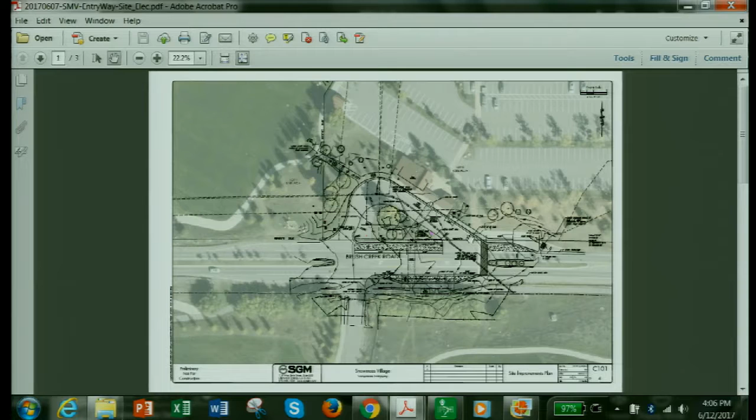The parking spots that are going to fill in where the current bus stop into town is - are they parallel or head in? They are parallel with the road, so cars are gonna be parallel parked along the edge of the road there. I believe I have to look at the dimensions, but I think it's 2 stalls in there, and that's generally what we see.

So the current lane that's there - that turn lane - it really isn't utilized. Majority of our transit movements are coming here and using this center turn pocket right here, and turning into our location. RFTA doesn't turn right to go into there, they stop here, so there's a really low amount of traffic count. Is there something I'm missing on that right turn? This one right here was just a bus stop pullout, so it wasn't really a right turn per se. It is signed for right turn, but it's not utilized.

So we're trying to use some of those concepts of narrowing the width so that it has that more safe feeling of pedestrian crossings as well as the traffic and bike calming.

Does the bike path come up any further than the existing? I didn't see that on there. Bike path is right here. But from the other side of the road, where does it cross? It doesn't - it stops down at the recreation center. But we still have crossing down there.

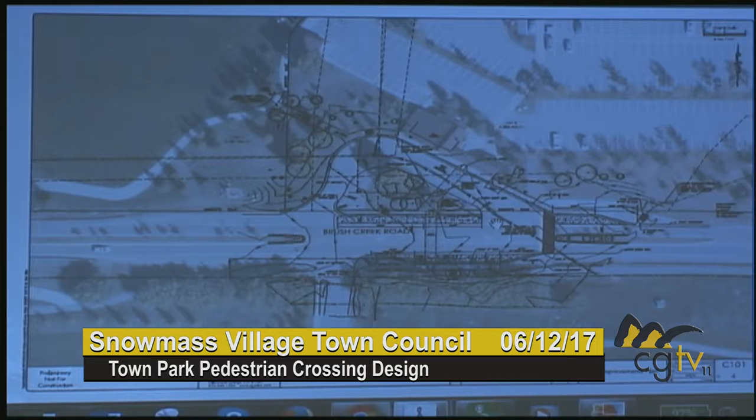So let's talk about this information area. You're saying 3 cars can get in there? 2. How often is the 15-minute used now?

Depends on the day, you'd have to ask marketing, but we realize that this is a potential to add a little better access to that building for people that missed the sign and don't really want to go into the parking lot.

They turn around and come back, go through the bus area. I see it happen all the time. They miss it, so they go through the bus area to turn around, or they park right here, get out of their car and go in. I see it all the time during ski season and when we have heavy visitors.

So we're trying to still encourage this location, but it'll still continue. It probably will, because that could be inconvenient. Oh, it's snowy, it's icy, I'm just gonna pull in here.

Is there any way that we can incorporate those two spaces in there to make it more convenient for people to park in there? Clint? David, answer that. I'm just, and it's a hell of a question. No. That's why I let David answer it.

Well, but the problem is, when they miss it, when they hit the roundabout, and they've come to Snowmass for the first time, they're totally confused at the roundabout, and then they've gone a little further, and they've already passed the parking lot. Well, there's that great big sign, if you'd only read about 20 things on that sign. They don't, and I wouldn't either, would you? Right, so then they see the information center, oh, there's the information center.

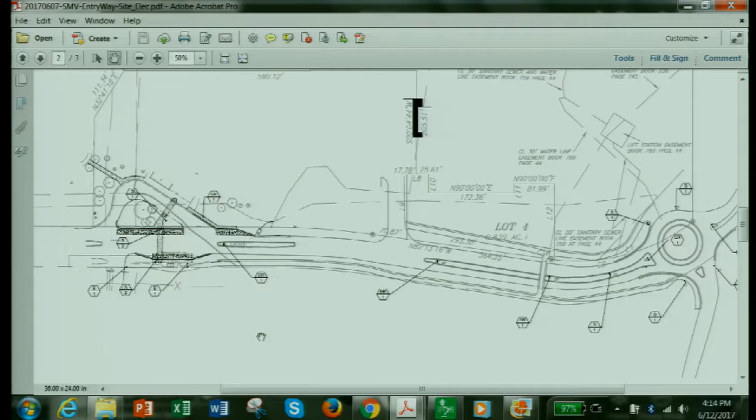So what's being proposed is to add the lights at the crosswalk, before the crosswalk, so that, sorry, that needs to go on that side. I need to talk to him about that. I just realized that. So you illuminate the pedestrian and all that.

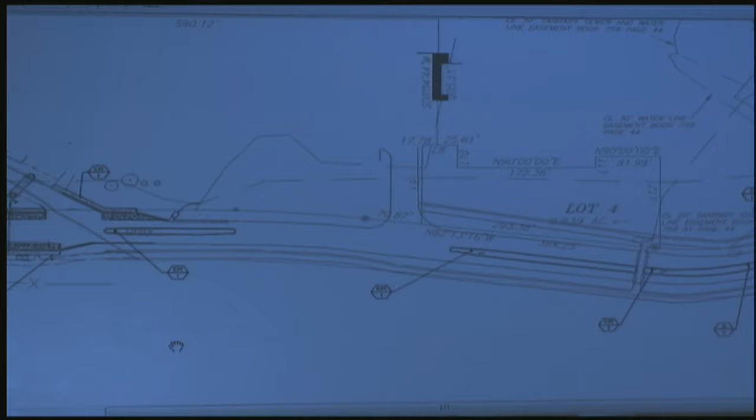And so S2 is a double head and S1 is a single head light. We are not proposing to do these additional lights at this location. Right now, when I initially talked about it, I said what would be the master plan, and then we can phase as we go.

So that's just, we can go back and forth on this one. I'm sorry, I was writing, what's not being proposed at this point? The ones around the roundabout? Yeah, so we have some existing here, and at the crosswalk here and here, but we're not proposing to supplement those. Are those ones around the roundabout similar to what you see at the other roundabout?

They are the standard detail, and I can show you the light if you want, or I've got Google, we can go look at it too. They're the same light poles that we have, because we're trying to be consistent in our design standards.

We have already converted these to LEDs. However, they are a different LED than was put in at the roundabout. The ones at the roundabout are a different manufacturer. These were a retrofit, so we would like to propose we go with the manufacturer retrofit so we have consistency. That is one of the project details we're looking at. It's not a large change-out, but I think it would be consistent to have consistent parts and pieces.

I guess the issue for me right now is that coming out of Club Drive, right here, that road, that corner is very dark. It is, and it has no lights right there, so we're proposing one right at that intersection, in addition to one at the crosswalk.

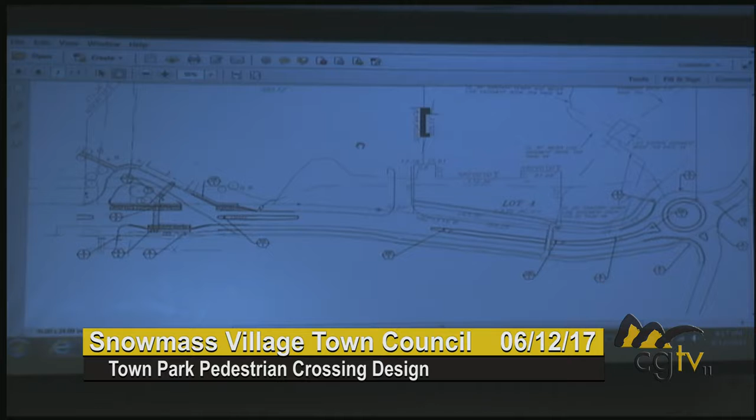And one for the bus shelter. So we actually have 3 in there. Let me go to this next drawing. I did not bring you, and I probably should, I apologize.

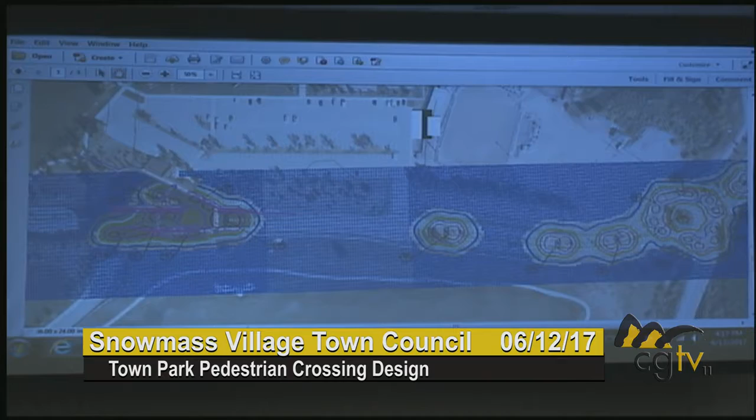The drawing that shows existing photometrics versus proposed. Basically, this is a plan that shows the lighting patterns, it's a little bit of an art, so don't get too dialed in on it. This is what would be proposed with the new lights in this location. So the summary is basically there's a consistently lit area that accentuates that it's high activity, there's pedestrians, there's a lot of things going on, beware.

That level of brightness compared to the Brush Creek and Wood Road roundabout is similar, because we're trying to have this at 0.1 foot candles, or 1.0, I can't remember which way it is, but that's the lighting measurement.

And I should have brought that other drawing, but this is existing conditions. If we were to put the rest of these in here that showed on that plan, it would basically connect this lighting so we wouldn't have like a hot spot, low spot, hot spot. We can consider that, but I'm looking right now at the budget we've approved to just focus on this area and continue to do these checks on it.

Is it what we all intended? Does all of this lighting meet the night sky standard? Yes, it's all downcast, it meets all the design standards there.

So the other thing we're proposing, and Bob, I think you had asked this question about smart technology, that we would propose to put in this location - I'm going back to this drawing. Basically, they have a feature that's an add-on to our existing lights, like a puck on top of it. It won't be visible unless you really are aware of it.

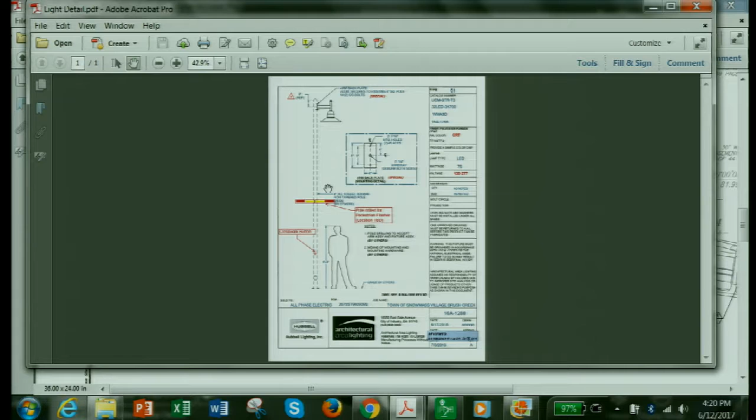Light bar there, and there's a push button here, and then there would be a pedestrian sign, the standard pedestrian sign on there. That would be those two locations that are at the crosswalk, right here, those two.

The other feature that we're looking at adding on the electrical side of things is a light inside of the bus shelter. As far as RFTA, we would like to move towards that as well, it's motion sensored, so that when it's occupied, and I don't know the answer if you can push button too, but if it's occupied, it illuminates the bus shelter.

It helps with sensing that someone's in the bus shelter instead of doing the old reflector waiver thing. So we proposed that, since we're doing all this work in this area.

This looks great. So the timeline is, we've got the design to this point. We are trying to determine, with this, it would take out this crosswalk. It would have, basically, we're looking at the asphalt treatments, is it milling this whole area, cutting this in? So we're looking at those different options as far as budget.

Just so you know, this road is in our 5-year plan to get milled and overlay. You can start to see some of the rutting taking place down here when you're driving through the roundabout. So I'm kind of taking a couple perspectives on phasing on this, on the asphalt side.

We'd like to get it out to bid as soon as we get the okay from RFTA on making sure that this meets their design on the bus stops, and still go out to bid for construction this fall.

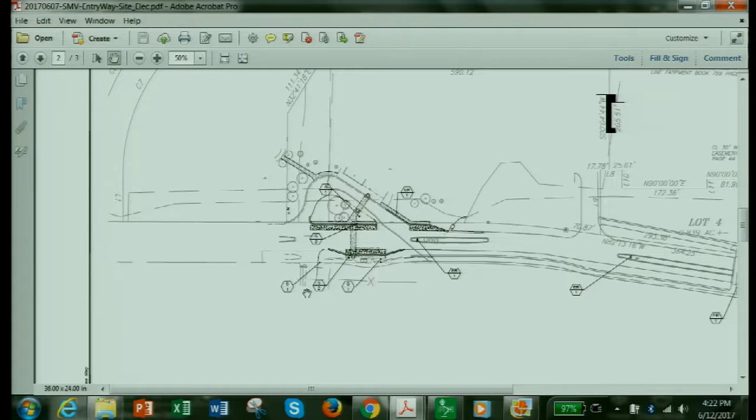And I guess on the current crosswalk, which is obviously constructed - where was it - looks different than the rest of the road, right? Yeah.

Are you suggesting that you might not take that red stone out at this point? No, I would take the red stone out because you don't want to confuse it. Right, yep, so this would be removal of this.

What I'm trying to determine is what's my limits on asphalt. So I know I'd have a patch here no matter what, and do I go from here and patch it all the way to this other crosswalk? It's just my limits of asphalt repairs. Is that red material, is that reusable for the new crosswalk?

No, it's actually getting pitted pretty bad because of snow removal and chemicals and things like that coming into the village. So it needs treatment, it needs to get removed.

And then we would do the same differentiation in color here and probably band it with the white as well, white concrete, so you have a visual. Is there a better product that would hold up? It's just the amount of traffic, okay.

And correct me if I'm wrong, but you're gonna make that decision when you see the bids come in. Yeah, and if they come in great, you can probably get a lot more asphalt down. If they come in super tight, we'll probably do a little less asphalt.

The other thing is, when we're gonna bid this, just so you know, is because I'm very cognizant of construction schedules, and the lessons we're learning is, don't have big restrictions on your construction. I probably will have an alternate to complete by June 30th of next year, just to see if my price differential from this fall to next spring is major.

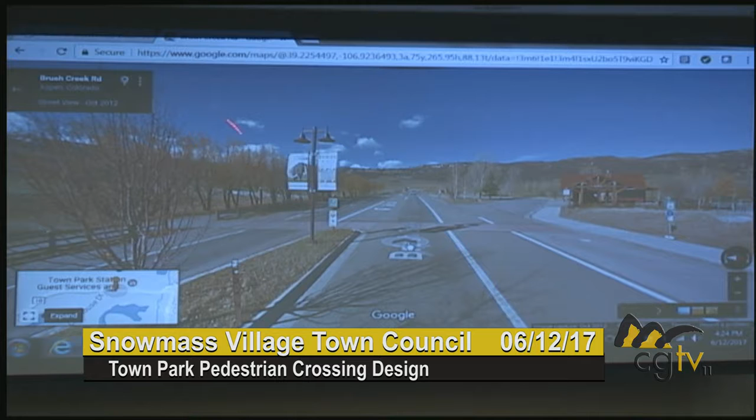So you're putting that fence back in, this opening? Yes, oh, we'll close that off, because this will no longer be a crossing, so we'll eliminate this and get rid of that. And then there's a fence opening down there. I don't know, you mean move down?

I know when they do Jazz Fest and stuff, they cross people there. Is that going to impact that? They will just incorporate this into their project. We talked about that, and they've been talking about changing some of the operations anyway, and just work with what is in place.

And how much fence panels come out, too. What's the distance from the new crossing to the only other place you can cross by the rec center? You know what I'm talking about? Oh, so you're talking down here? Yeah, because those are really the only two places they can cross, right? That's right.

Travis? Where'd I go? Oh, there we go. So the other tab, okay. Go here? Aren't you looking here for the measurement? Oh yeah, there we go. Oh no, we don't want that. Go here, can I go here? About that much, Lisa. I think there we go.

Let me zoom in. So you're talking about this crossing here? Yeah.

I mean, theoretically, someone could cross where the rec center drive is, but then they'd hit the fence, right? There's an opening right there. There is an opening, I think, but it's not a sanctioned crosswalk. I think we should continue to look at all these. We've improved some and just continue to monitor.

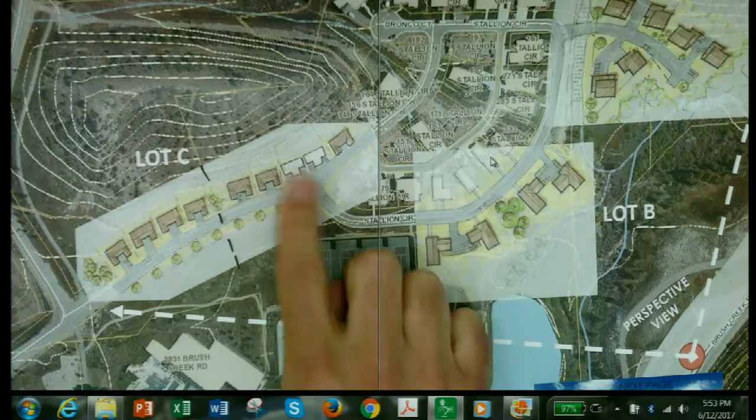There's already some there, yeah, there's three. There's Hy-Vee living down there, right there. And that's pretty nice.

The other ones, what are we talking about? They're different, so duplexes, single family, and they're 2 and 3 bedrooms, a mix of 2 and 3 bedrooms. There's a mix of 2-story and 1.5-story. These are conceptually designed for walkout basements and 1-story. These are 1.5-story and these are 2-story.

The other thing, down here we have the duplexes, we're talking pretty steep grade. Yep, and we understand that. There's some of the designs that, again very conceptually, were meant to actually have them built differently so that we wouldn't have to dig so much and save some money in constructability, which we did do on the ones that are Hy-Vee's existing. Yeah, they are right at the toe of the slope.

They are. We actually talked about condemning the whole area where the four on the left are, you can see the property line that goes right there by the C. To the left of that is Horse Ranch homeowners, and to get the road into Rodeo Place, we had to condemn it. It's not extremely valuable land because it's zoned open space and the uses are low, but it was a very complicated valuation. In the grand scheme of things it wasn't that bad, it was like $115,000 to gain the road access.

Can they park on the street in that section where those duplexes are? So when we get into the design, one of the things we want to talk about is road width here, and do we do some kind of bulb outs and have parking so that it could slow traffic going in and out? We hear those complaints about speeding traffic. That gets into snow removal, we haven't got that far yet.

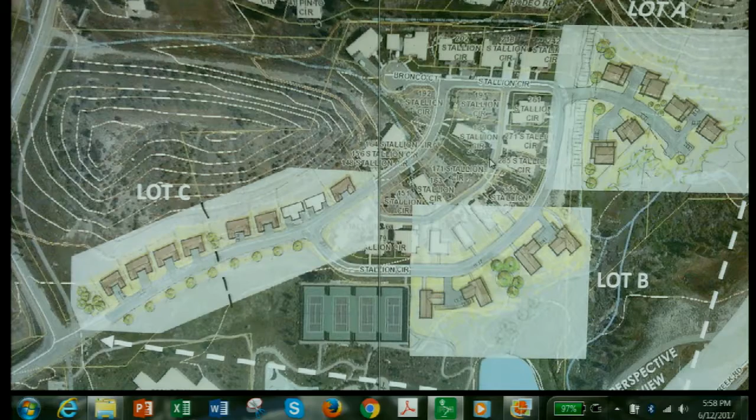Is the rest of Lot B developable land, or is that where all the wetlands are? There's a lot of wetlands. The creek really meanders down there to the bridge where it goes into the county. And we had trouble when Seven Star wanted to be annexed into the town, even getting a viable site on the upper side. And what you're not seeing here is that there's this tail that wraps around the mountain. That parcel's 67 acres, but it's all subject to deed restriction in the county.

So there's the Seven Star that's usable, a triangle shape, and the town, as part of the annexation, got the front lot where checkpoint, the parking area is, and then the owner got the other side, and it really came down to one large home site. That's what he wanted, one large home site.

I was gonna show you, we've got all that mapping. This is not the map to show wetlands or not, but okay, any other points for discussion? We're gonna keep moving forward and we'll keep you updated.

I had a question, just when you're going back to talking about demand and all those things, I had a discussion with Susan and Dwayne from the school district, and I don't know if they ended up talking to you. John Moy, I went to the superintendent's office. I wasn't that bad of a kid, but that was my principal joke.